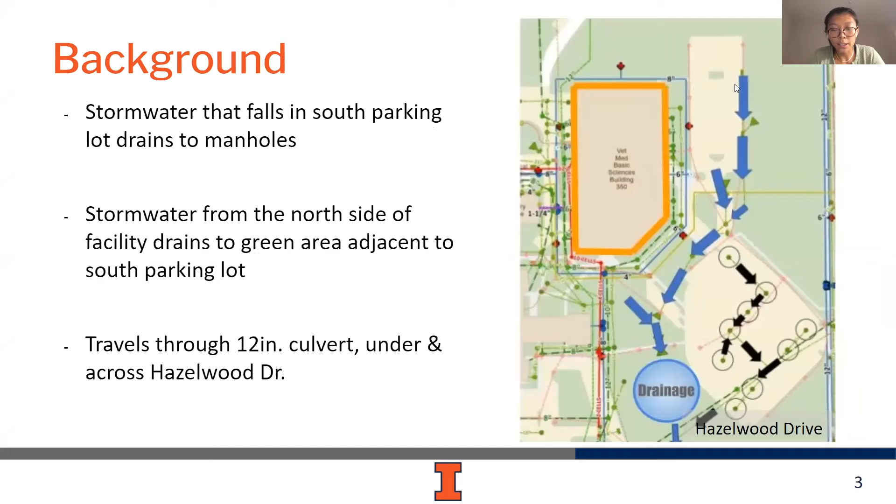On this slide, the picture shows the drainage routes for the veterinary medicine facility. Currently, the stormwater collected on the north parking lot drains in the direction of blue arrows shown in the diagram to the blue circle, which is an area adjacent to the south parking lot. The stormwater collected on the south parking lot enters the manholes and follows the black arrows that travel across Hazelwood Drive.

Here are some of the problems this facility faces during high rain events. Stormwater floods the dairy farm across from Hazelwood Drive. The runoff leaches the nutrients in the soil at the dairy farm. So our project aims to reduce the stormwater runoff and beautify the entrance of this facility by incorporating green infrastructures. Now my teammate Abhijit will elaborate on the design portion.

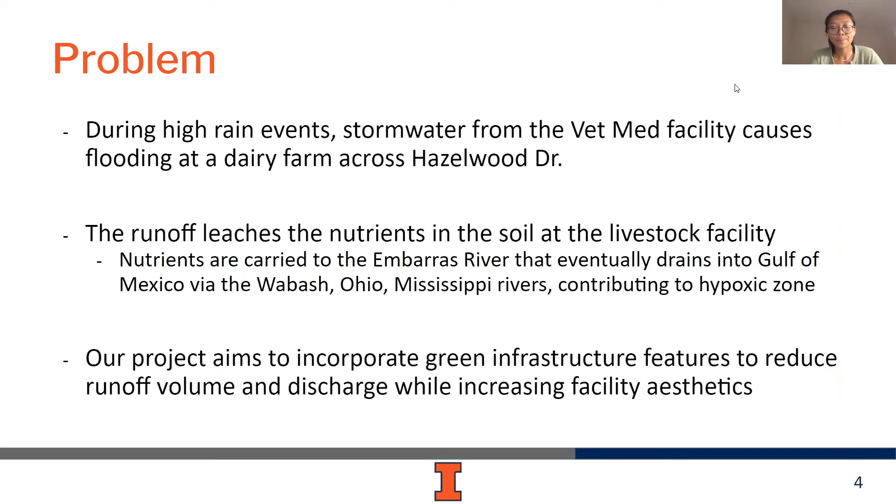Thank you, Sisi. For the purpose of assessing reduction in the runoff at the facility due to our design solutions, we consider two design rainfall parameters. The first is the 95th percentile rainfall. In accordance with the EISA Act, a federal facility needs to develop measures to retain 100% volume of rainfall due to a 95th percentile event.

The 95th percentile event is that amount of rainfall which is higher than the rainfall received in 95% of all events based on historical records. Historical data was retrieved for Urbana, Illinois, and this data was plotted, and the value was calculated to be 2.18 inches per day.

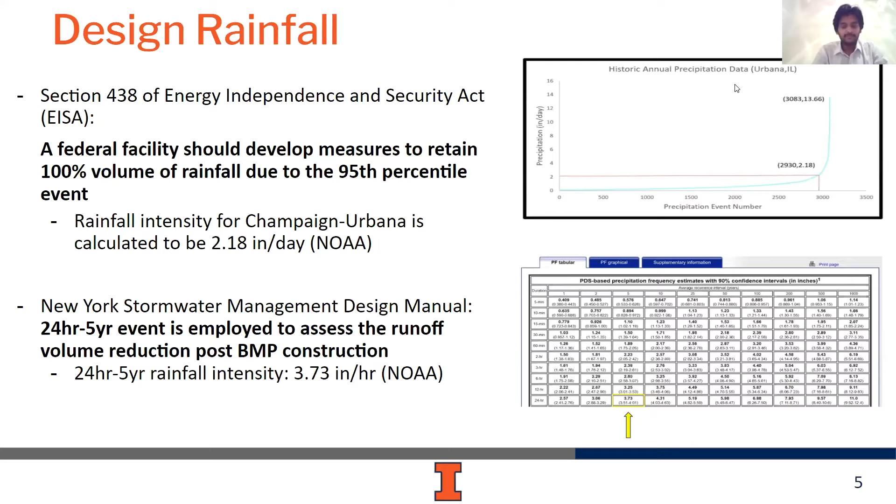Secondly, in accordance with standard texts such as the New York Stormwater Management Design Manual, 24-hour 5-year events are used to assess the overall reduction in runoff volume. From NOAA, this value was noted as 3.73 inches per hour. Next, please.

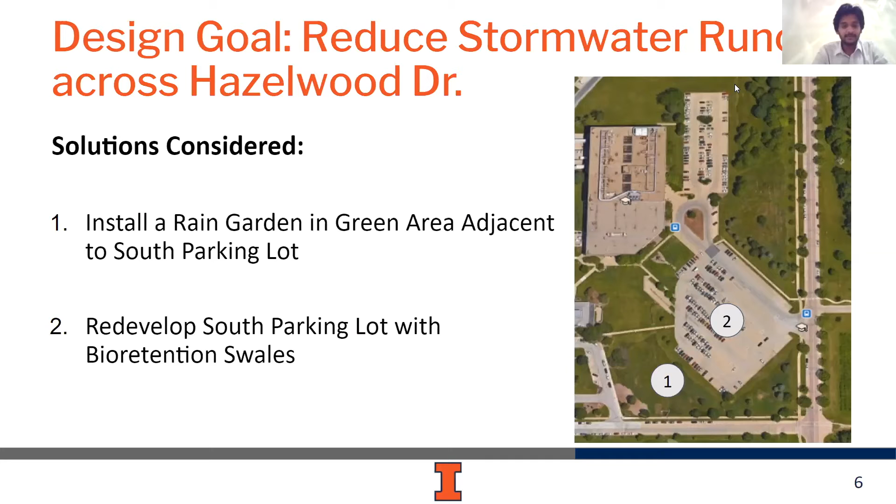As CC mentioned earlier, our design goal is to reduce the stormwater runoff at the facility. For this, we consider two design solutions. The first is the installation of a rain garden in the green area adjacent to the south parking lot, which would capture the runoff from the north parking lot and its surrounding areas. The second solution is the redevelopment of the south parking lot by the introduction of bioretention swales. Now Ryan will walk you over the rain garden overview.

Thanks, Abhijit. Our proposed rain garden will retain runoff during storm events and is designed to prevent rapid flow across Hazelwood Drive. Two areas were considered, called the north green area and the south green area. The north green area being the area to the east of the north parking lot, and the south green area being depicted by a blue circle to the west of the south parking lot.

Ultimately, only the south green area was considered because only one storm drain flows to the north green area, while the rest of the north parking lot and the surrounding green areas flow directly to the south parking lot and then across Hazelwood Drive. The image on the left shows three different design options listed as A, B, and C that we chose to evaluate for both volume reduction and cost.

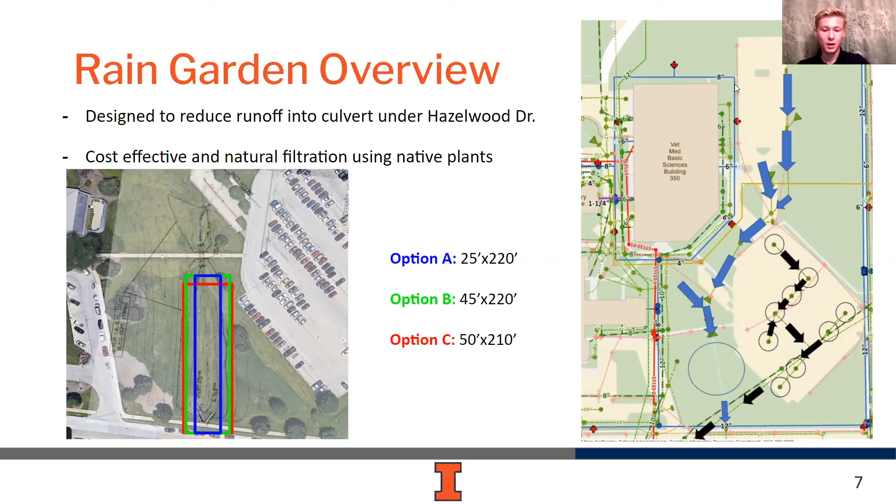The smallest design would require roughly 500 cubic yards of excavation, while the largest of the designs would have just over 1,000 cubic yards. If soil tests show that the soil in the area is uncontaminated, we could keep it on site for reuse. The silty clay loam in the area, according to soil samples, has a drainage of roughly 14 inches per day, which is adequate for a rain garden, which requires between 12 and 24 inches per day.

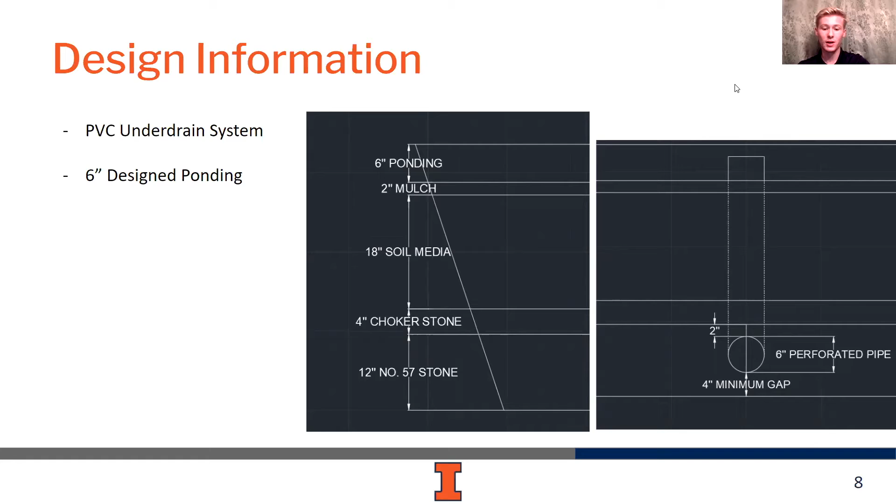Additionally, the existing slopes in the area allow for more than 6 inches of ponding, which was our design shown on the previous slide. To meet design requirements of 100% reduction, we could either increase ponding on options B or C to 12 inches, which would match the existing slopes, or we could expand the rain garden to the area directly north of the sidewalk in that southern green area.

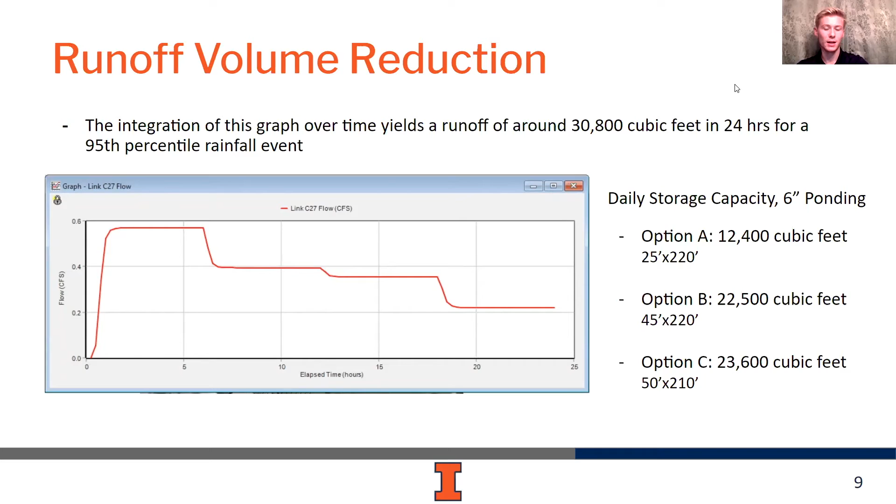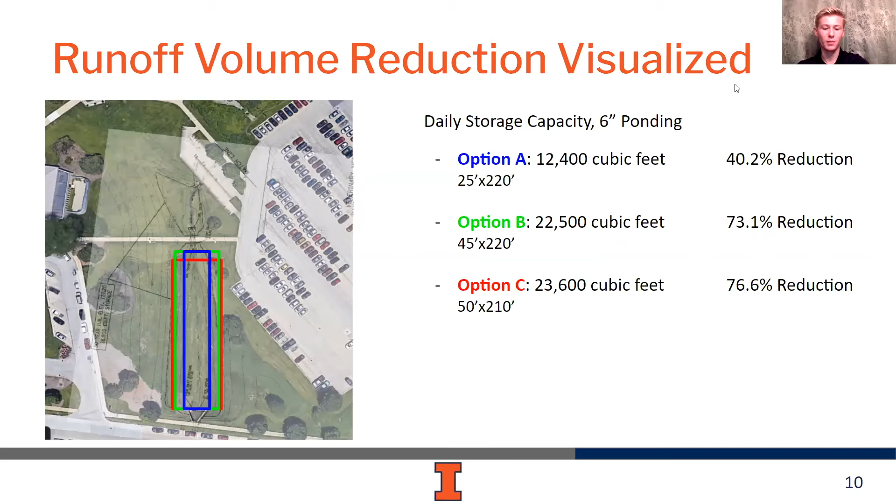Thank you, Ryan. Our second design solution pertains to the redevelopment of the south parking lot. The south parking lot forms the main entrance to the facility and has a surface area of nearly 2.5 acres and a catchment of nearly 3 acres. Next, please.

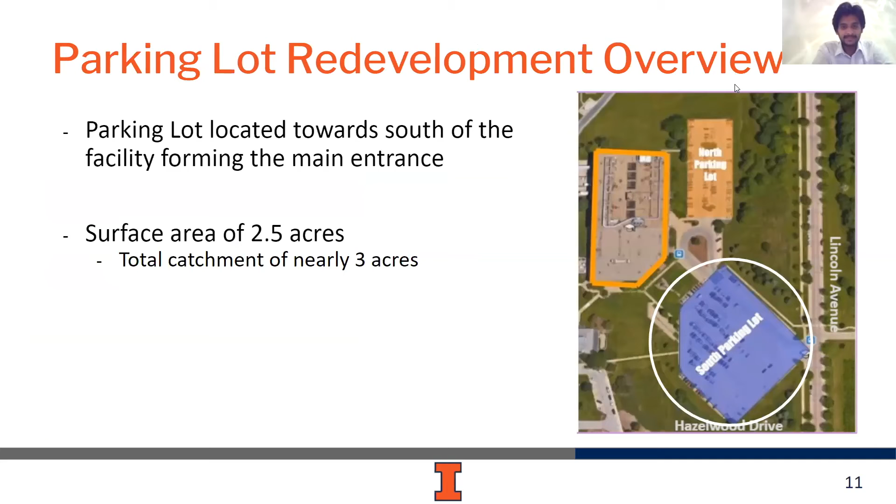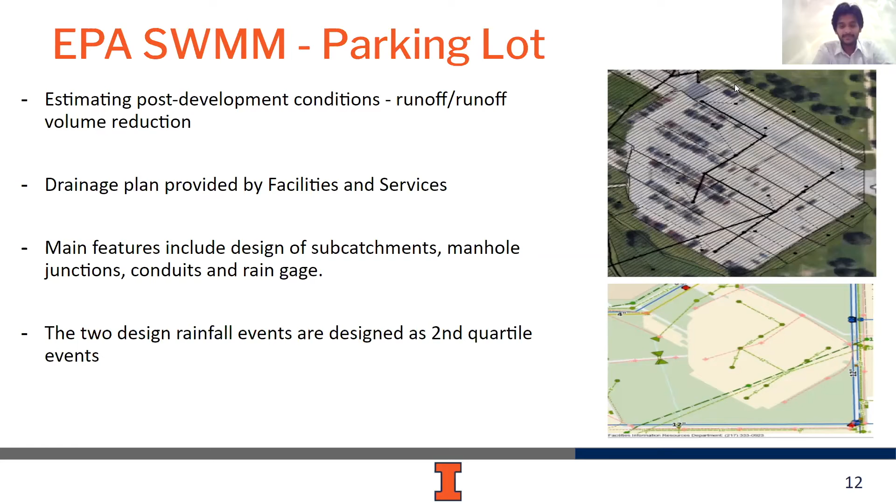For modeling purposes, EPA SWMM has been used to assess the runoff reduction in the post-development scenario. The drainage plan of the existing parking lot was retrieved from the Facilities and Services Department of the university. The main features of the EPA SWMM window consist of subcatchments, manholes, conduits, and rain gauges. The 2 design rainfalls mentioned earlier are designed as second quartile events.

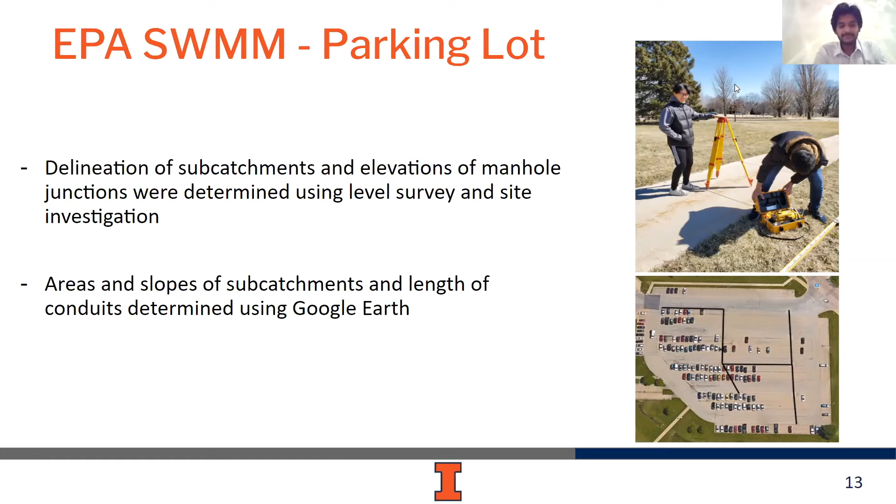Next, please. To accurately model the parking lot, the elevations of manhole junctions were determined using level survey and site investigation, and this also aided in the delineation of subcatchments. The areas and slopes of subcatchments and the length of conduits were determined using Google Earth. Next, please. Now Justin will run you over the parking lot redevelopment plan.

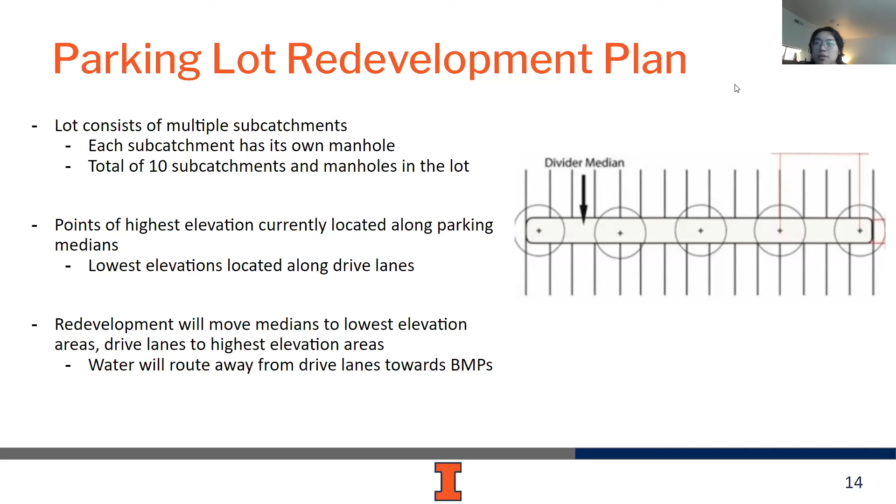As Abhijit previously mentioned, the south parking lot currently consists of many subcatchments due to elevation differences around the lot. Parking medians in general would be the optimal locations for BMP implementation, but the highest elevations of the lot are situated currently at the medians. Due to this, our design includes a redevelopment of the parking lot so that our BMPs are located at the lowest points in the lot while still being situated at the median. This allows for efficient stormwater routing that minimizes water in the drive lanes while also maximizing retention.

Here we can see a basic bird's eye view of the parking lot drawn within AutoCAD. Our design consists of 8 bioretention swales of varying sizes with a perforated PVC piping system that drains to the storm sewer below. The parking spaces are on the north and south sides of each swale, while the manhole covers are denoted with squares with crosses. In terms of parking, we will see a 48 spot decrease, which is calculated to not be an issue according to common parking lot requirements.

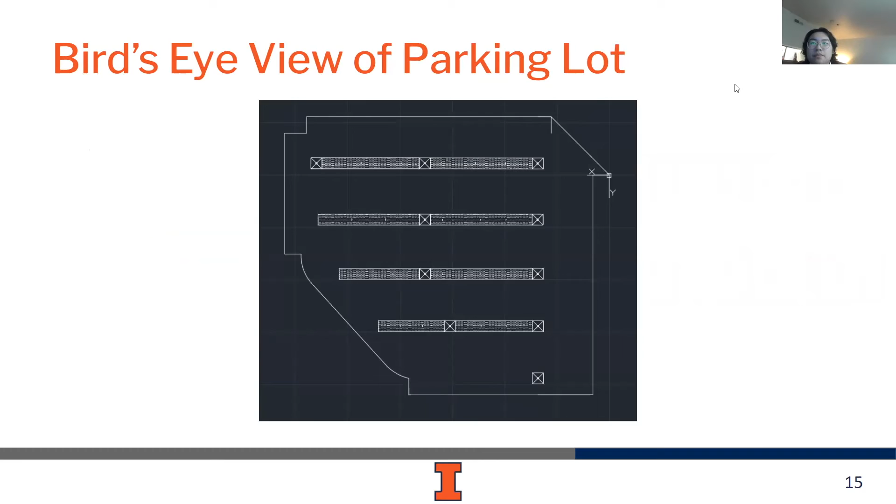Now, the above image shows our proposed swale sections overlaid onto an image of the existing parking lot. As stated before, there are 8 overall swales, but some swales contain different sections, which are denoted by the different colors. This is again because of the various subcatchments in the lot. For example, water falling within the section labeled 1 will route to a different manhole than water falling within section 2. The bottom image is a bird's eye view of the swale made up from sections 1 and 2.

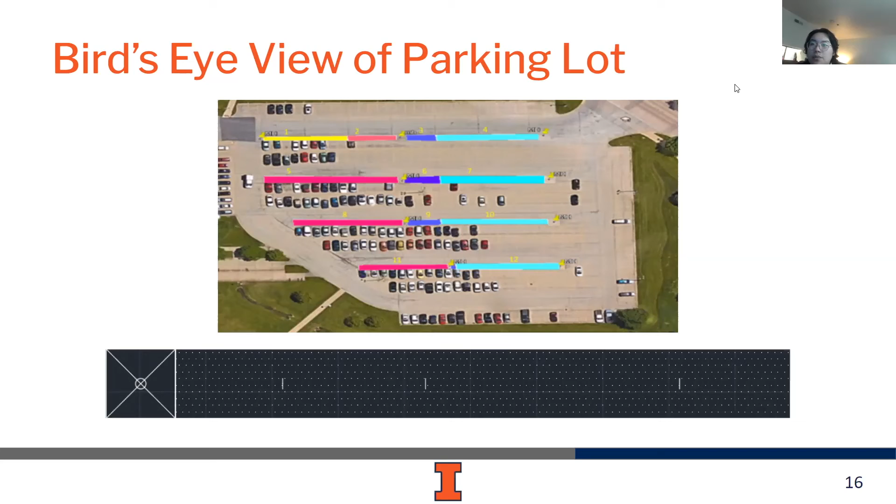The small vertical markings represent the tops of the perforated piping system. These are spaced unevenly because the differing areas of section 1 and 2 must be accounted for, thereby ensuring that the retention of each subsection will be evenly distributed. This design approach is applied to all of the swales within the parking lot. And now I will discuss the dimensions of our swales.

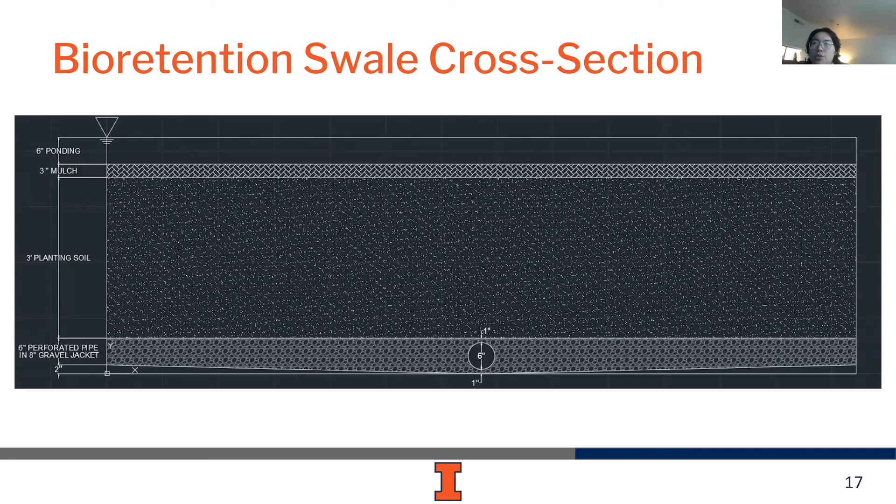This image shows a cross-section of our swales. There will be a 6-inch ponding layer on top, followed by a 3-inch mulch layer, then 36 inches of planting soil, and then an 8-inch gravel layer that has a sloping bottom. The 6-inch diameter perforated pipe will be located in the middle of the gravel layer, an inch from both the top and the bottom. Now Abhijit will further discuss EPA SWMM for our swales.

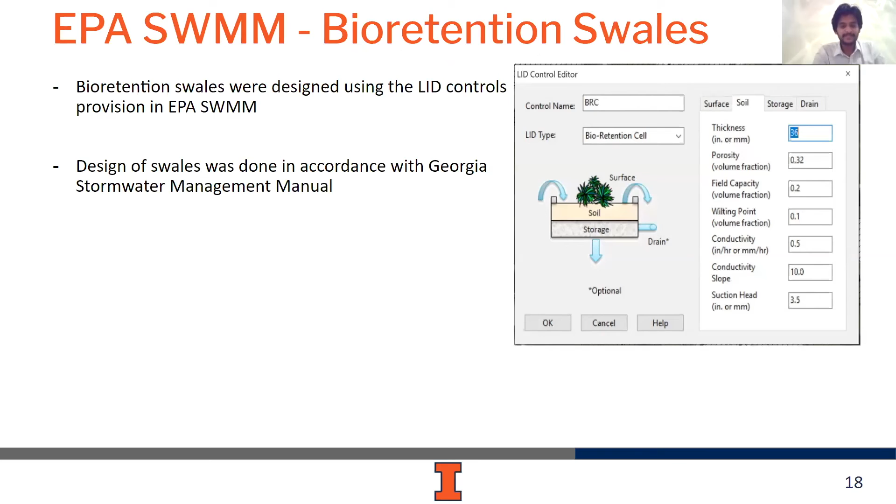Thank you, Justin. The bioretention swales were designed on the EPA SWMM window using the LID controls provision. The sizing of different components in the bioretention swale was done in accordance with standard texts such as the Georgia Stormwater Management Manual. Next.

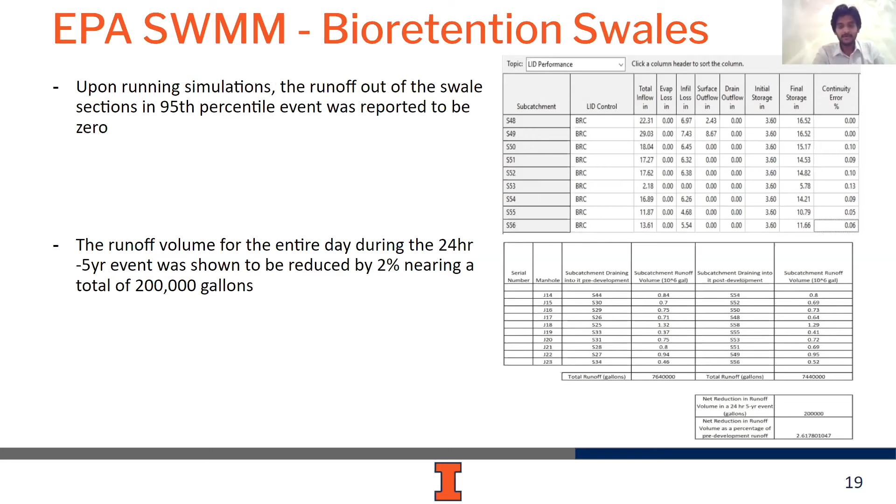Upon running the simulations, we find that the runoff out of the swale sections for a 95th percentile event was 0 for all sections, and the overall reduction in runoff volume for a 24-hour period for a 24-hour 5-year event was nearly 2%, or a total of 200,000 gallons. Next, Justin will run you through cost estimates.

We computed our preliminary cost estimates using a limited version of 2011 RSMeans due to a lack of access to newer versions. We inflated our obtained values to 2020 costs; however, there are some missing components still. This estimate should be considered on a scale for evaluating the different options. Now, rain garden option C is the most expensive rain garden design, but it offers the most detention capacity at just under 24,000 cubic feet.

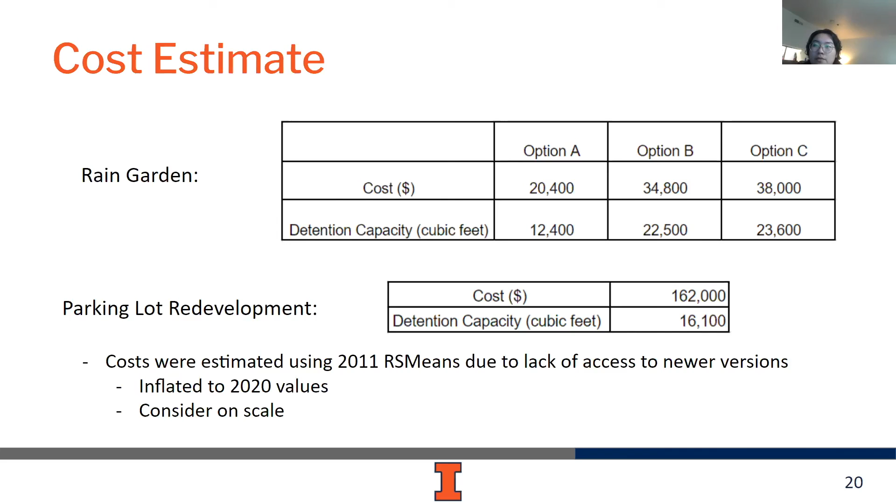On the other hand, the parking lot redevelopment will be much more expensive than the rain garden construction and maintenance, and also offers less detention capacity than 2 of the rain garden designs. But it's still necessary to combat flooding of the parking lot. Next, I'll discuss our decision matrix.

Our matrix is sorted by 4 decision factors, which are detention capabilities, cost, difficulty of implementation, and aesthetics, with detention capabilities having the most weight and aesthetics having the least. The lower the score, the better the option. All in all, rain garden option C has the best score of the 3 rain gardens. This result falls in line with the goal of our project, since option C provides the most detention capacity at a negligible increase in cost compared to the next best option. Now, Ryan will summarize our project.

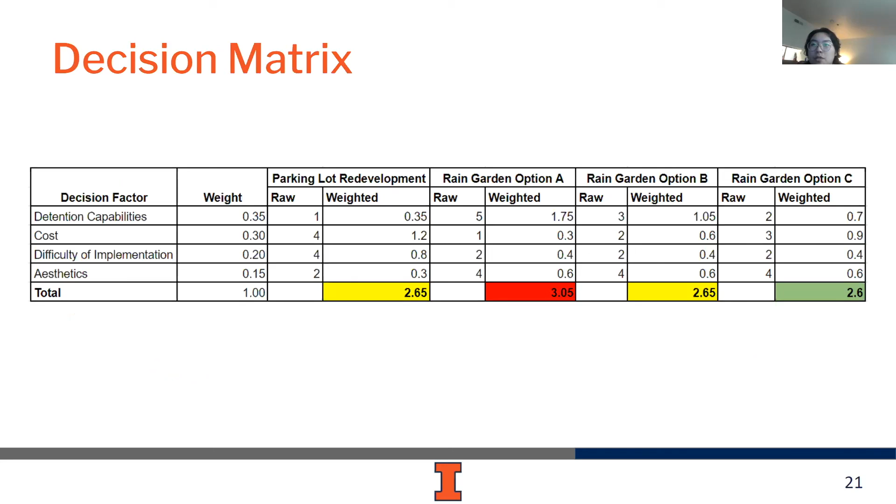Our primary objective with this project was to mitigate runoff from the veterinary medicine facility across Hazelwood Drive to prevent it from leaching nutrients from the student farms to the south. To reiterate, our project aimed to reduce flooding in 2 important areas: the culvert leading under Hazelwood Drive to the dairy farms and the storm sewer that also empties on the farm properties. Because the culvert and storm sewer are separate, there must be 2 solutions to address both systems.

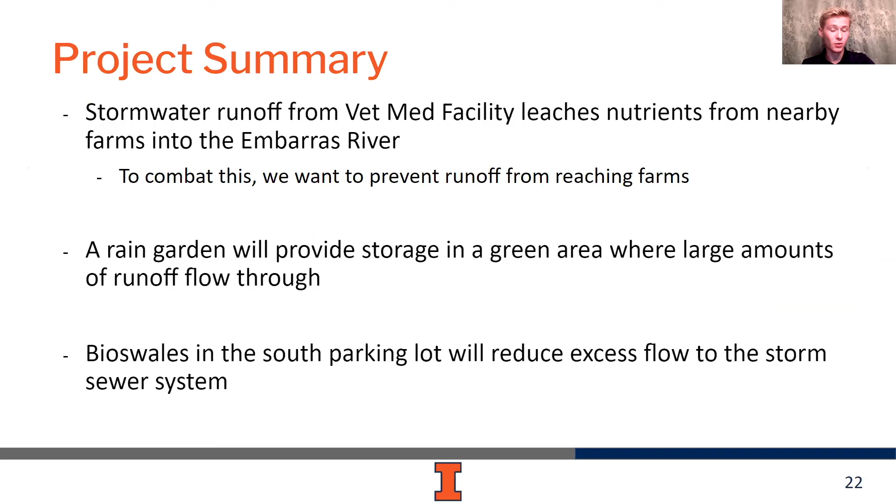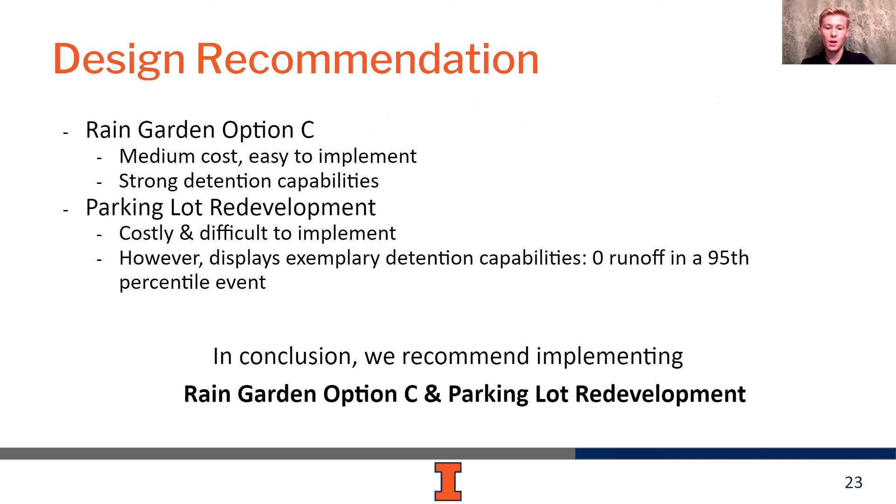Our primary strategies for combating the issues are a rain garden in the green area to provide storage, as well as bioswales in the parking lot to reduce flow and peak events. Based on our decision matrix, the most effective solutions would be rain garden option C, which, as Justin said, had the highest detention capacity, as well as the parking lot redevelopment plan with bioswales. Both options were more costly, but ultimately our simulations showed they would have excellent detention capacity in our target 95th percentile events. And the university has shown support for similar green infrastructure improvements in recent years. Next, we have some additional considerations for our project.